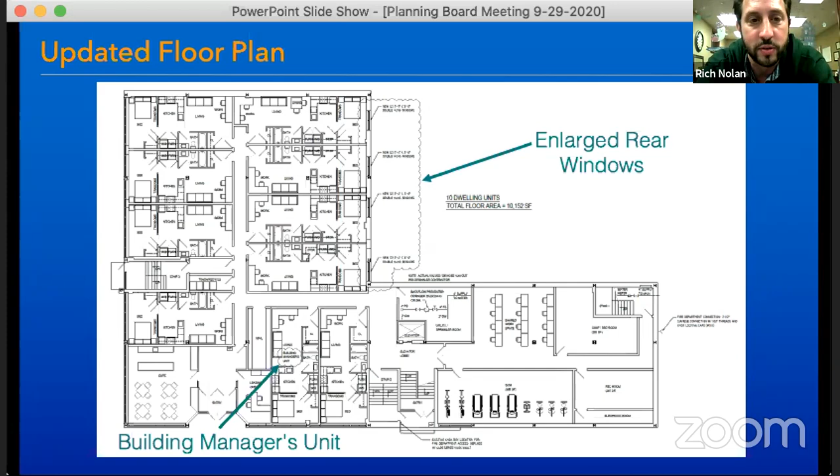One of the comments from the neighborhood was they would like to see an on-site building manager, maintenance person on site there, trash removal, somebody on site to just deal with problems and make sure trash is getting taken out. So we've designated a unit on the ground floor there that's being referred to as the building manager's unit. That was in response to a neighborhood request.

Guess you could move on. You brought this in here. This is good. One of the very recent comments that was brought to our attention is the USDO requirement to provide screening around any rooftop mechanical units.

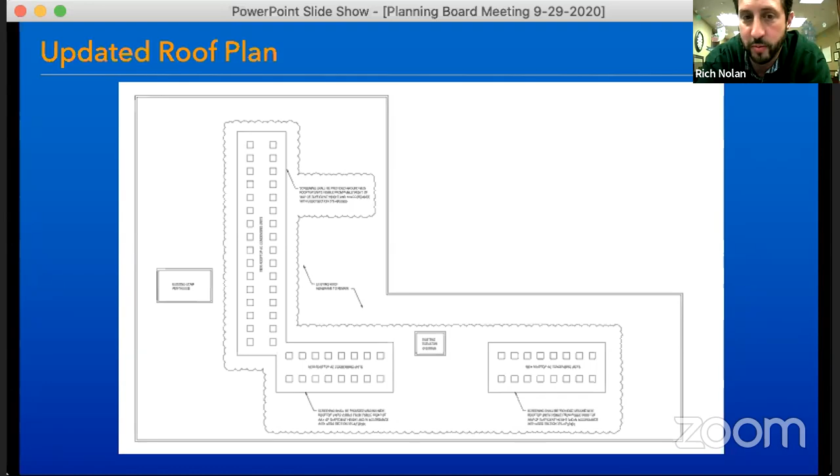It needs to be blocked from the public right of way. We haven't studied yet the site, how far back these are and the angles of view, but we're proposing here, if it's required, the appropriate height to block the view. You can see these boxes around the condensing unit on the roof. They're also required to go along with the architectural design. So we'll work through that as we continue to develop the building through building permit submission. That's the change there.

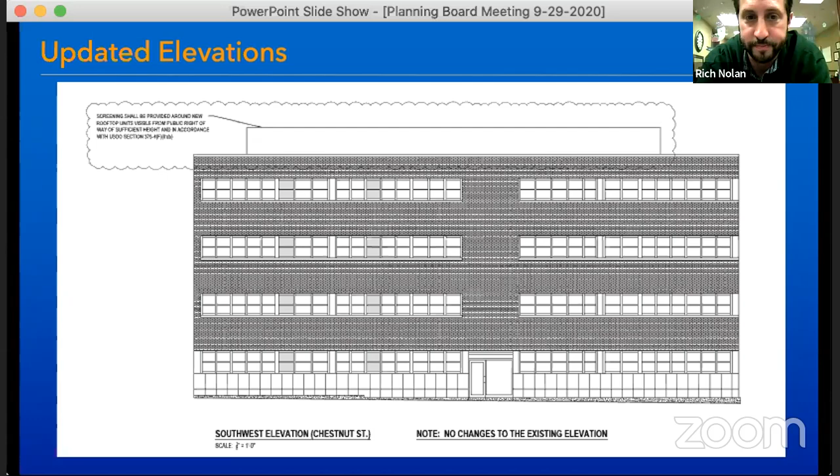This is talking about the same thing here. You can see an elevation that would be adding some screening on the rooftop. This is tough to see here, but you can see a little cloud there.

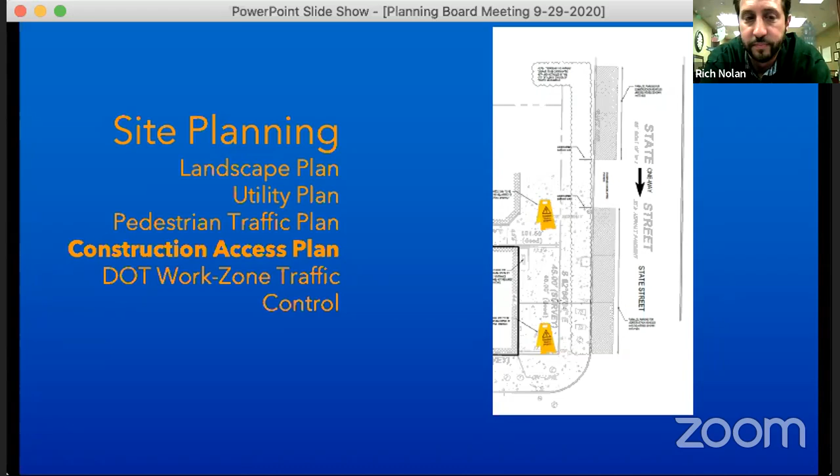Okay. Are there any questions or comments from the board members?

I have one. What kind of material do you plan on using for the rooftop screening?

This is something that just came to our attention today, and we haven't dug into it too much. We're supposed to go with the style of the building. It's a brick building, but we don't know how far back it is. We're thinking metal screening or a vinyl screen, maybe in a color that goes well with the brick. It's so far up there that vinyl or metal might be fine, and it probably shouldn't contrast too much with the building, but be similar.

It's not totally dialed in yet, and we'll keep you in the loop as we think through it more. But the first thinking is maybe a vinyl siding with a color that kind of matches.

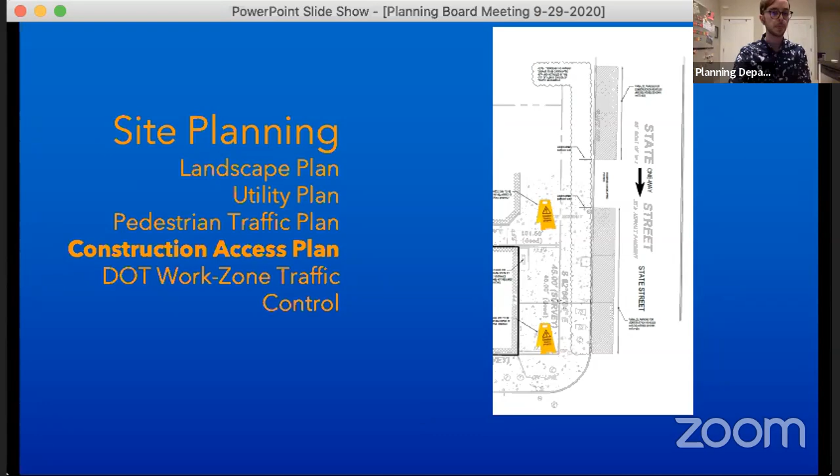This is the list of six review standards that the USDO requires the planning board to review in order to make a determination on a major development plan review application. I'll go through each standard along with our staff recommendation. So for the first one - sorry for the spacing - the first review standard is that the project will not create a significant adverse impact on the surrounding neighborhood, or any significant adverse impacts will be limited to a short period of time.

The project is located within a MUCU zoning district, but it abuts four other zoning districts. Impacts are anticipated during the construction period, but the applicant has provided a maintenance and protection of traffic plan to limit disruption for vehicles, pedestrians, and cyclists when materials are delivered and other construction-related activities occur. A street opening permit will be obtained for any work within the right-of-way, including proposed pedestrian aspects, which will be addressed through that permit process. The applicant has also spoken to securing parking for residents in the evening, responding to the change of use with more people requiring evening parking compared to the previous office use, where daytime parking was the bigger need.

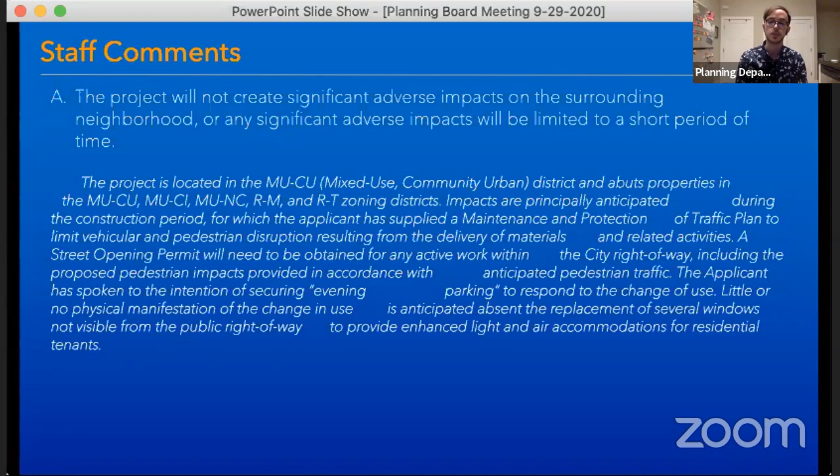Little or no change has been made to the physical characteristics of the building other than the replacement of windows, which would not be visible from the public right-of-way, and this improves quality of life for residents by providing more light and air.

The second standard is that the project would not create any risk to public health or safety. All potential impacts have been identified and mitigated to the extent practicable. The major one noted through our review is pedestrian crossings, since the proposed multifamily use would likely increase pedestrian traffic across the street to the plaza, so new crossing infrastructure will be installed.

In response to the neighborhood's comments, the floor plans have been revised to include trash storage closets, so there's no external trash storage. Also, a residential unit has been included in the floor plans for an on-site building manager to be more responsive to any maintenance issues at the site.

C, the project being consistent with any relevant prior approvals or conditions. There are no known prior approvals that the project needs to comply with.

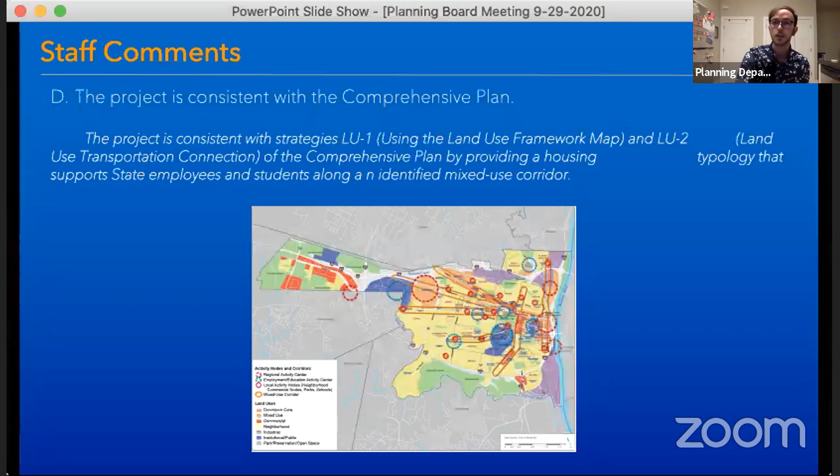The project is consistent with the comprehensive plan for strategies Land Use 1, which is using the Land Use Framework Map, and Land Use 2, which is the Land Use Transportation Connection. It's providing a housing typology that supports nearby state employees and students along the identified mixed-use corridor, which is shown on the land use map right here.

And then finally, the project is consistent with any provisions of the USDO and Albany City Code, which it has been reviewed by all relevant city departments and it does comply.

And that the project complies with any requirements and conditions of prior development permits or approvals. There are not any prior development permits or approvals related to the property that have any requirements or conditions that need to be satisfied in conjunction with this review.

And then just for the planning board members, the memo was sent out stating that this was an unlisted action through SEQR. But based on further review, it's actually a Type 2 action under section 617.5C18 — the reuse of a residential or commercial structure is a Type 2 action. So therefore, the planning board does not need to make a declaration under SEQR for this project tonight.

Okay, thank you. Will we have anybody testifying tonight for this? Were there any other questions from the board before I switch to public speakers?

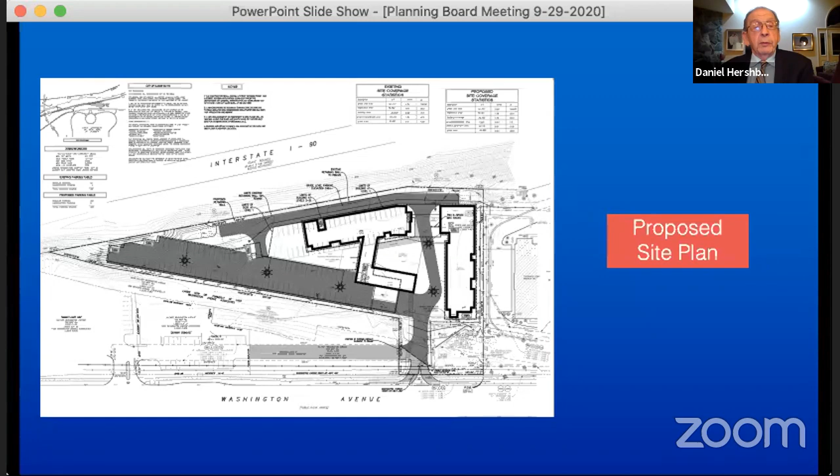Next, this is the plan showing the archaeological protection. In 1994, I was the engineer for a project called Washington Center, being proposed by Peter Gullo, the developer. It included everything from where 1355 Washington Avenue is to 1475 Washington Avenue, including the old Hellman Theater, the Hellman Hotel, and a lot of other properties. A portion of it was split by this archaeological easement.

In doing my research, when I did the environmental assessment form, this had not yet been declared a historic property. There were a few maps of it; nobody knew exactly where it came in here. I was lucky enough to have done surveys up and down the area.

The same alignment crosses down Brevator Street, Melrose, and this railroad easement went all the way down to Morton Avenue, the top of Morton Avenue, which is where the railroad really started. The people on the first railroad thought they could get the railroad to go up Morton Avenue. Unfortunately, the railroad needed to be pulled by horse and buggy to get it up to the top of the hill, and then after that it ran on its own strength.

So I got the history of that down, and we hired Hartgen. In the review, they also found remnants of the water culvert that came from 6 Mile Waterworks and went all the way down to the reservoir in the city.

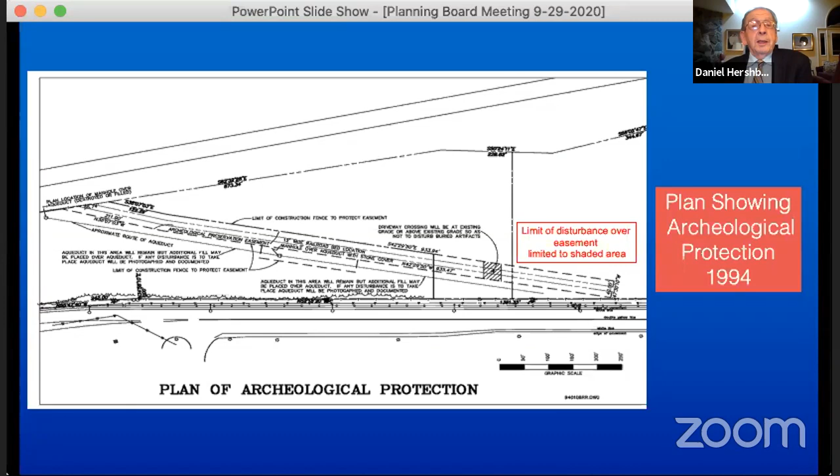So next sheet you can go on to. This compares the statistics with USDO. Lot width, we will exceed. Impervious lot cover is significantly less than that.

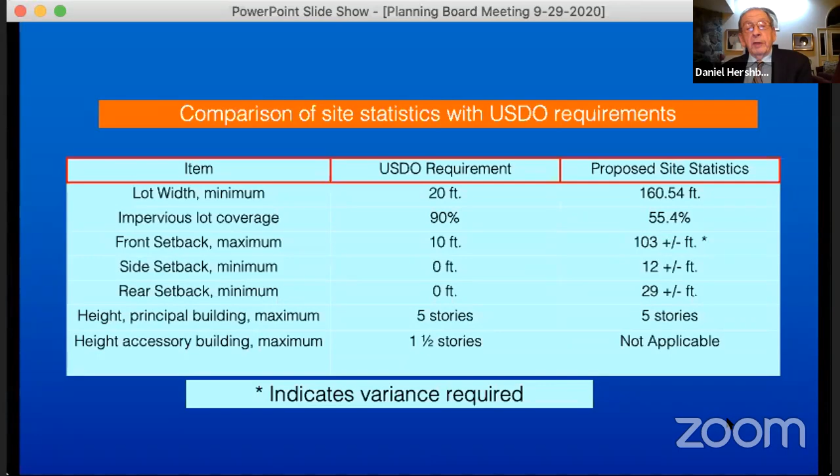The front setback is the one we need a variance for. The front setback is supposed to be 10 feet and we're 103 feet back, I'll explain later why that's necessary. Side setback is 0, we have 12 feet plus or minus, and a rear setback is 0 feet, we have 29 foot. 5 stories is what we're proposing, which is the maximum. We do not have any accessory buildings.

Chairman, you said we need 2 variances, and I think that was based on the fact that originally we proposed 207 parking spots, which exceeded the number required for the site, since we only have 240 units at 1/2 per unit. It turns out that on review of the zoning ordinance by Brad Glass, he pointed out that requirement only applies if it's surface parking. In structured parking, we don't need that variance. So we're down to 1 variance we need.

This is the historical easement. Now it may not look like much, but on the left you'll see the start of a berm that goes quite a ways; later on in the site it gets to be like 20 feet tall. The amazing part is that was all done by hand in 1831 - they piled all the sand up with wheelbarrows and hand tools to make that berm for the railroad to go on, and that still exists.

Unfortunately, the railroad ties, the rails, even all the appliances for the railroads had been taken off, so those are all gone. The photo on the right shows you looking to the east of the driveway.

That shows the other end of the driveway. Going through that, we put a wall in to preserve that portion of the easement, and we limited our area to the area that was allowed to be disturbed in granting this archaeological easement. Peter Gold granted the archaeological easement in 1995, and it obviously still exists today.

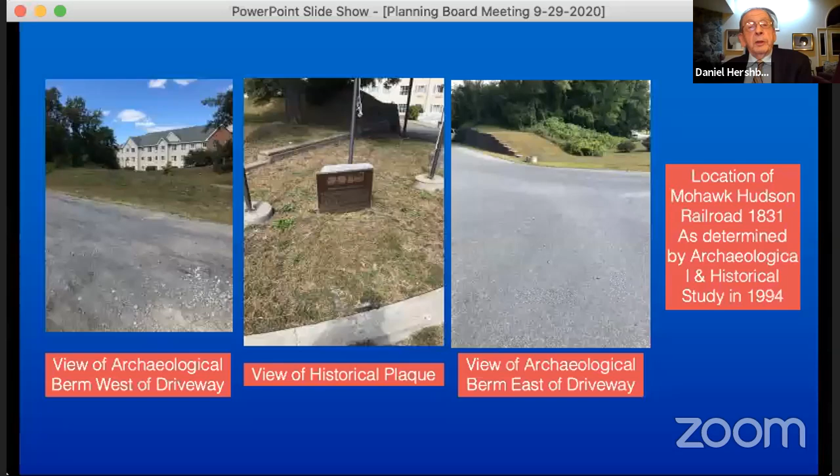Next. This is the report that was made up. It was phase 1 and phase 3. They actually did some recovery on it. It says remains of historical cultural resources were identified along the project area's northern and eastern limits. And this is the only remaining portion of the first railroad, the Mohawk and Hudson, constructed in 1831 and had the first intercity run of a railroad.

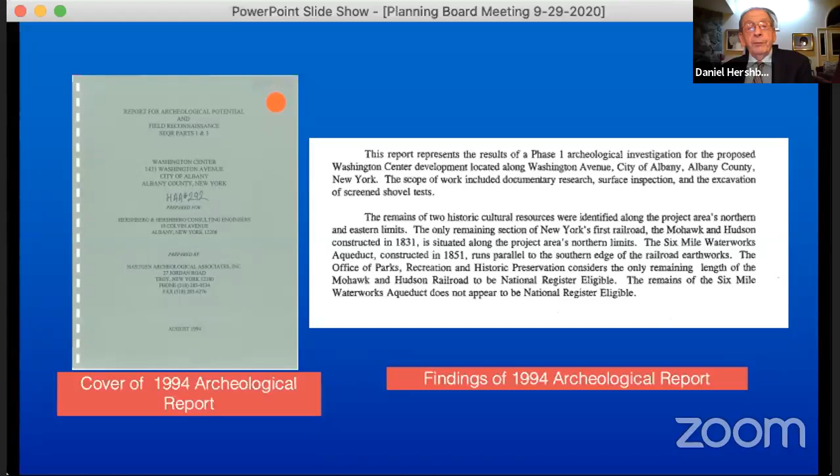Next, this is the view from existing and proposed view from Washington Avenue. On the left is the view of the Crest Hill Suites now. And on the right is the view of our new building superimposed on the same view.

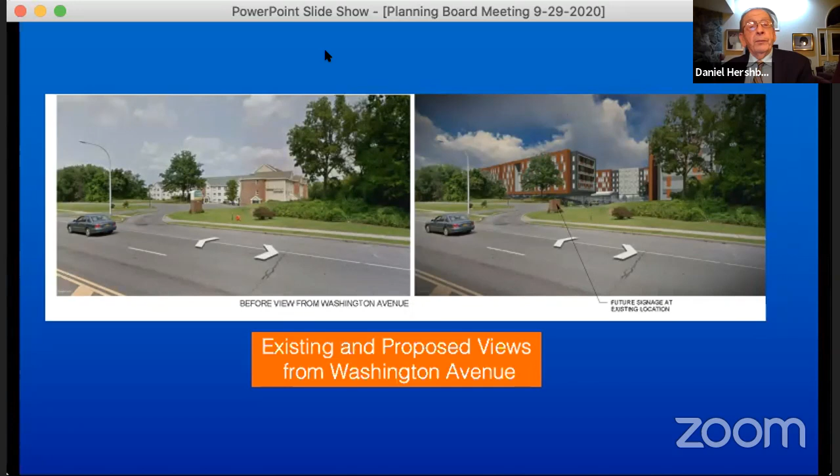Next, this is existing and proposed aerial views. You'll see on the left is Crest Hill Suites, on the right is our proposed project. Takes up the same space, but we occupy it differently.

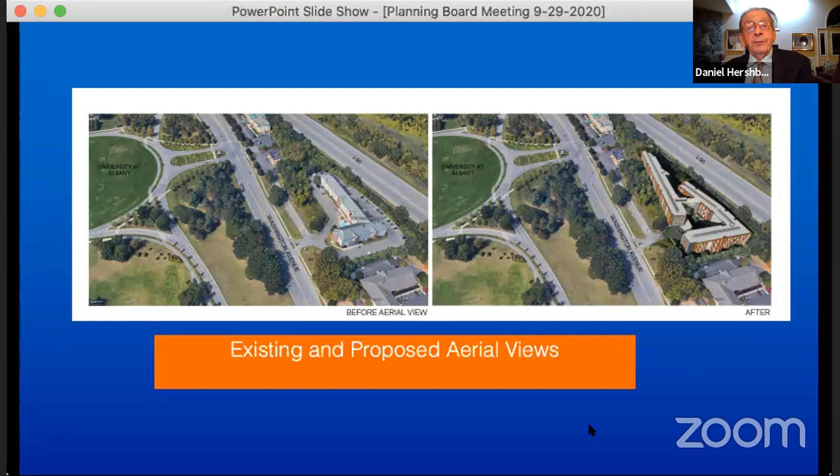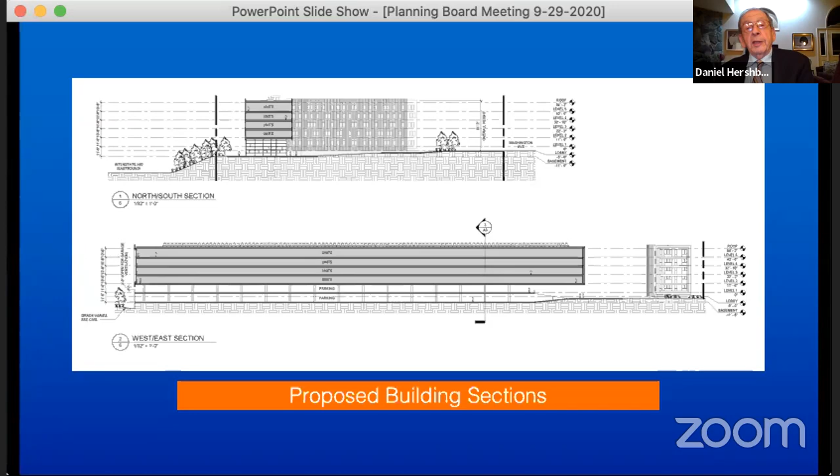Next, this is a section of the building, and it indicates the stories and the height of it, and it shows it in reference to the I-90 on the left of that north-south view, and the archaeological easements on the right portion of that.

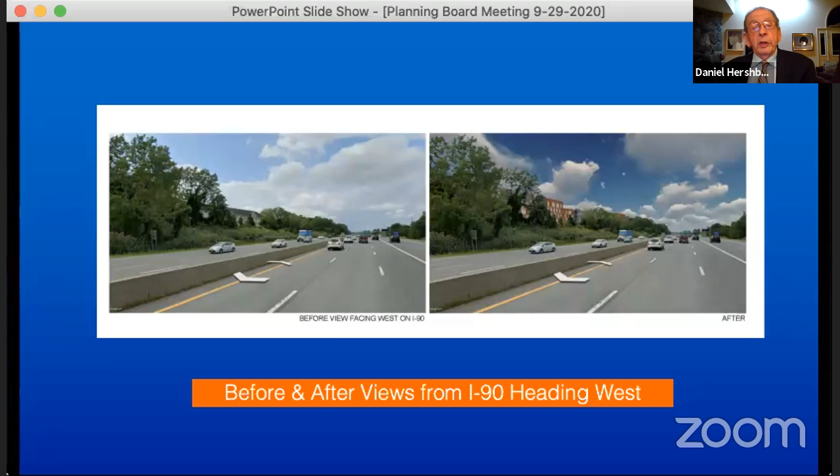However, there is a row of pines and spruces that was planted. People may recall when Cresthill Suites was first built, we built that retaining wall. Within 6 months, it became tagged very heavily. So we planted a whole bunch of coniferous trees along it to screen it, and it does a good job now. You can't see that wall at all.

Next, oh, that's the same view. I think I gave you before and after. I think that's the same view.

Okay, views from the plaza. This is internal to the site. One is looking at the internal plaza, and one is looking down the side of the building. If you're at the corner closest to I-90, looking east, that's what you would see.

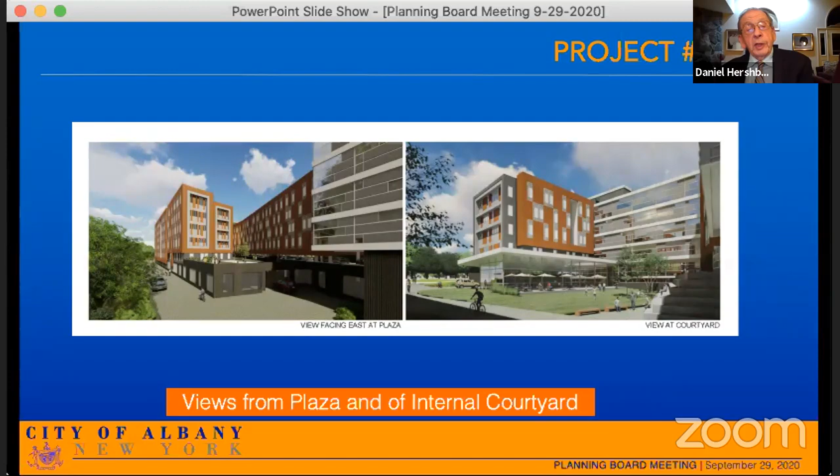Next, engineer's report on sanitary sewage. We had designed the I-90 pump station when it was first put in. We did a modification of it in 2016 by increasing the size of the pipe, so it now has adequate capacity to handle this project.

Engineer's report on water. The chairman was concerned about the water. Since the original projects were all built there, the city this past year activated a booster station on this entire system, which added the pressure by 10 PSI, so that the average pressure at the site was between 38 and 40 PSI and dropped down to 22 or 24 PSI at high draw times, is now going to be at almost 50 PSI.

That's adequate to handle the potable water without doing a pressure pump on it. For whether or not we run for fire protection, we'll wait until that design is completed. I think it may be enough, but we may need more. The water is a very small percentage of the available water, and the system is adequate to take it.

The chairman mentioned at the agenda meeting that there were signs up at the medical office building about what not to flush down toilets. I'm guilty, I'm the one who insisted they put them up, because the first time we opened that pump station, we found colostomy bags, plastic rubber tubing, and a whole bunch of things that don't belong down the toilet. So we put up that sign to try to convince people to use a toilet for its proper purpose. It's worked quite well. We find very little debris in the pump station now, and we have a screen system that grinds up any debris that comes into our pump station.

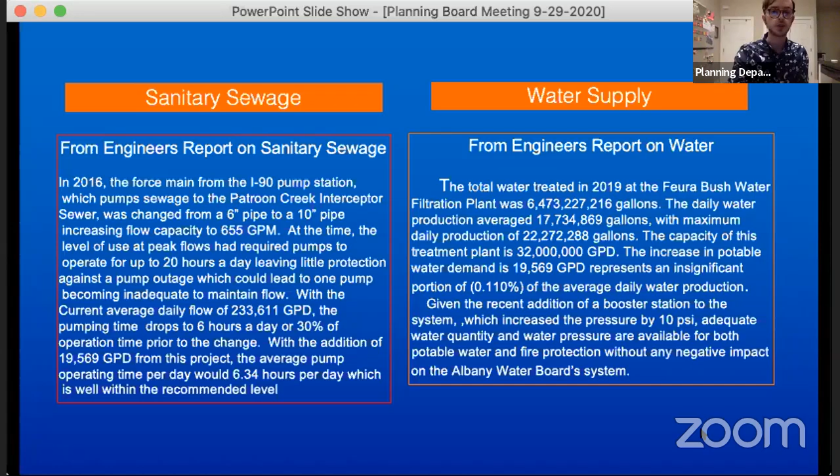Next. So Dan, that's actually ten minutes. I'm not sure how many more slides, let me look to see. Yep, so it's the last slide. Are there any objections from the board on continuing with just the last slide? I think we can keep going just a little bit.

Okay, quick summary: the development preserves the railroad embankment archaeological easement. There will be no change in the location of the curb cut on Washington Avenue. For potable water service, the new booster pump will not require a separate booster pump, and there will be adequate water for fire safety with the new booster pump activated. The decision on the fire pump requirement is awaiting a hydrant flow test, which we've requested from the city. Sanitary sewer collection and the I-90 pump station are adequate to serve the site.

The 2019 Washington Avenue Patroon Creek Corridor Study provided a variety of solutions, including pedestrian and bicycle improvements, and the applicant is willing to participate in funding that, since there are large portions of that project involved. The geotechnical study defined infiltration rates between 8.5 and 24 inches per hour, averaging 12 inches per hour, which is ideal for green infiltration methods including porous pavement, which we intend to use on site. Sorry, I took an extra minute.

Is that it? That's it. Okay, questions from the planning board? I have more of a comment.

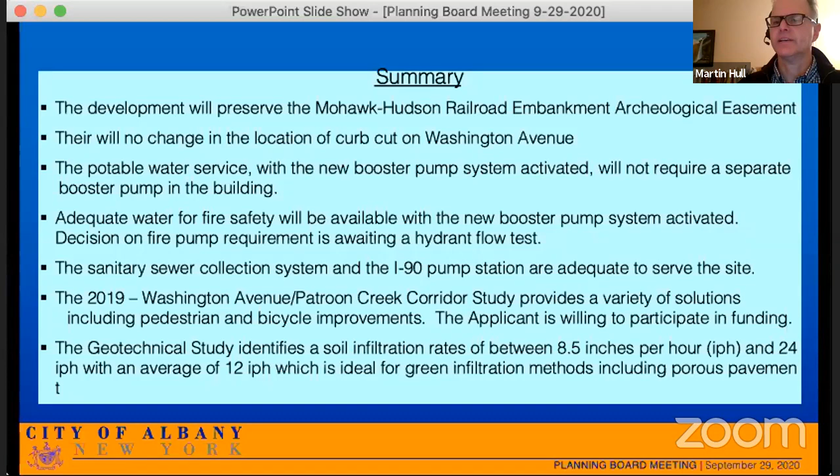Okay, thanks. Looking at one of the aerials that Dan showed, it seemed to already indicate there was a connection across the property. Am I wrong about that? There is access to the Dunkin' Donuts. I was referring more to the east. Back to the east. Okay. Thank you for the clarification, Martin.

We looked at connecting to the Extended Stay America, but it didn't seem like from student housing to an extended stay hotel there would be much inner traffic. When it was Cresthill Suites, it might have made more sense, but the front portion shown on the corridor study would actually interfere with the archaeological easement. We're willing to talk to the city about it further. Other questions from the board?

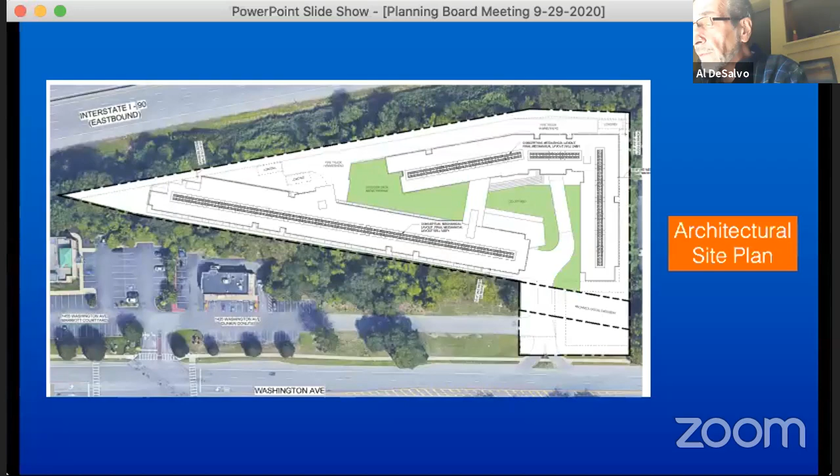So our task tonight would be to vote to declare the planning board as lead agency for the project. Do I have a motion? So moved. Moved by Roman and seconded by Chris.

Any discussion? As you might note on the agenda, there are a number of boards and commissions this has to go through before we move forward, so we'll definitely be seeing this project probably another couple of times. Thank you, sir.

Okay, all of those in favor, please say aye. Aye. Aye. Okay, it's unanimous. We will be the lead agency on the project.

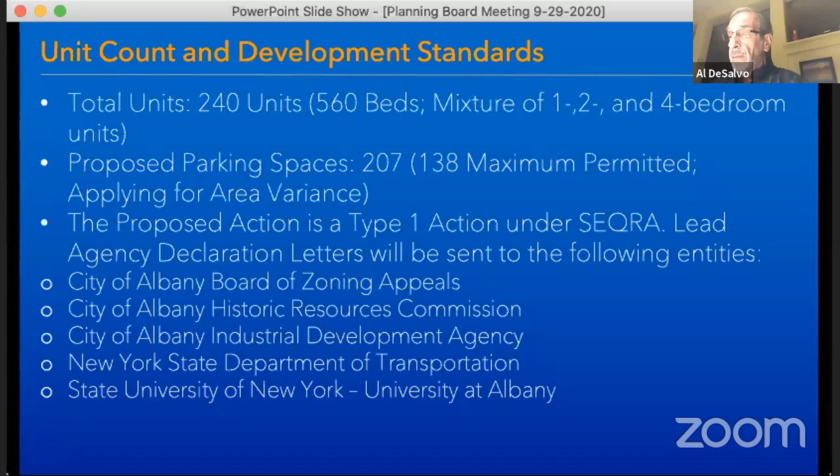Okay, the next item on the agenda is just an informational piece. We aren't taking any testimony. This is just to provide an update regarding 60 Colvin Avenue, and the update is on the result of the test pit sites.

And Al, just bear with me, I'm just bringing up... No, I'm not seeing it. Oh, I'm sorry about that, Tony. I forgot that Joe was not going to be attending tonight. Bear with me just one second. All right, Tony, you should be able to unmute yourself and turn on the camera if you'd like. How was that? Yep, there you go. Okay, perfect.

So I think just to give the board a little bit of context, the applicant had requested some time just to share the results of the test pit sites, since it was a point of discussion at earlier meetings for the project. So really this is just to share the results, and if there's any questions on what the tests found, essentially.

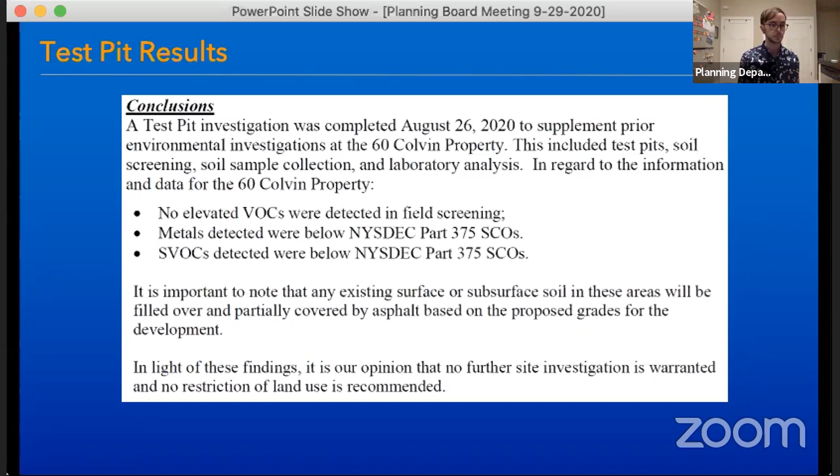Zach, could I just point out one thing? If you go back to that previous slide - that center red square that we dug, the one closest right there, that one, I believe there was a plan put in by Dan Hershberg. I asked him to overlap that with a yellow line indicated from a previous Clough Harbor study, which talked about an area of potential fill, and that is right in the center of that area. I had asked Dan Hershberg to provide me with two measurement points from the existing pavement and from the existing corner of the building to where we dug that. So I just want the board to know that, because that was one of the concerns, that we test that area, and that was there.

Okay. Any other thoughts, comments on this before we move on, or are we all set? Any questions from the board? Okay, I guess we'll move on. Thank you very much for the update, and we'll see this project, I guess, pretty soon again. Yes, thank you.

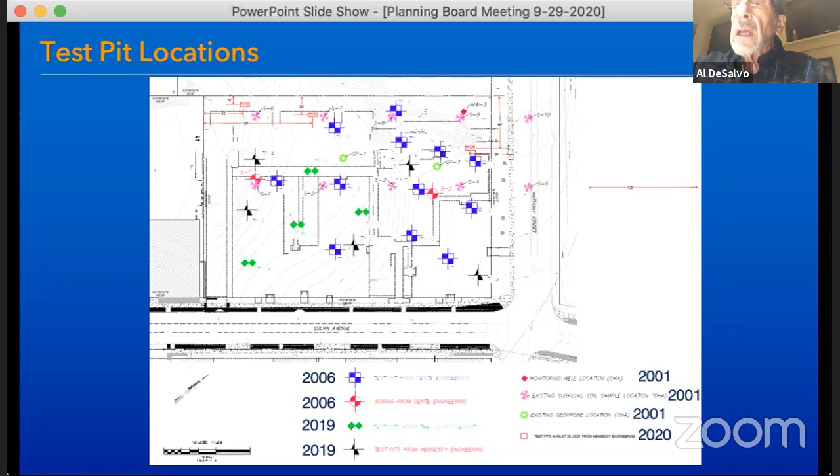Will this be presented by our counsel or by you, Zach? This is being presented by the applicant, and then once the applicant's done presenting, we'll go through the planning department's initial comments for the project, and also provide some time for board members to give initial comments based on a request made by the applicant. I think at the last meeting, the applicant was put at the very end, so it limited their time to get feedback from the board, I think due just to fatigue from a long agenda. So this was really the opportunity for the applicant to get the board's feedback and make sure they're heading in the right direction, so they can make any changes necessary to align with what the board was wanting to see for the project.

So the applicant will also provide an update regarding the September 21st Common Council meeting? Yeah, just to talk about the zoning map amendment as well. Okay, thank you.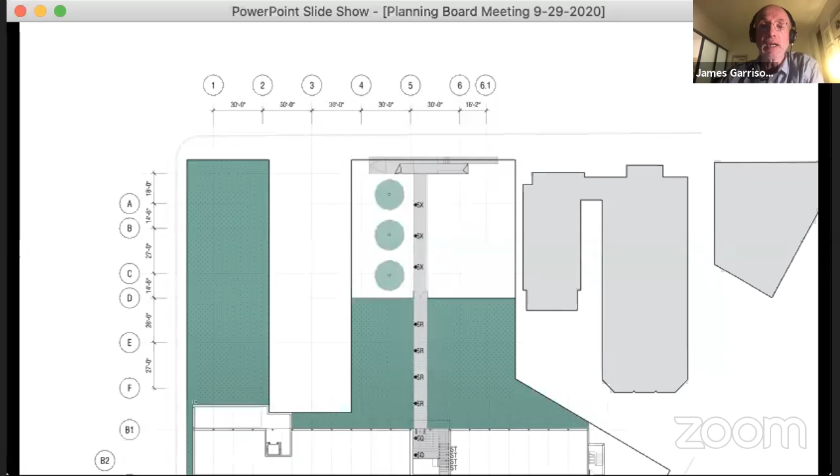All right, this is that entry. We constructed an entry, a place for people to walk, wait for the bus, get access up, take care of the slope, and basically you'll see Building B in the background, and a few trees in there. They won't be that big to begin with. All right, let's keep going. Just another image of that entrance gate / bus stop waiting zone.

Next, please. That's the bridge leading over the green embankment to the accessible entry, which ultimately would be integrated with Building A. But keep going, please. All right, this is a blow up of this area. Zach, if you can help me, that snaky piece on the east side is a ramp, and that takes us from the highest point we can get at it on Crank and brings a gentle rise of 1 to 20, so no handrails, up to the plaza.

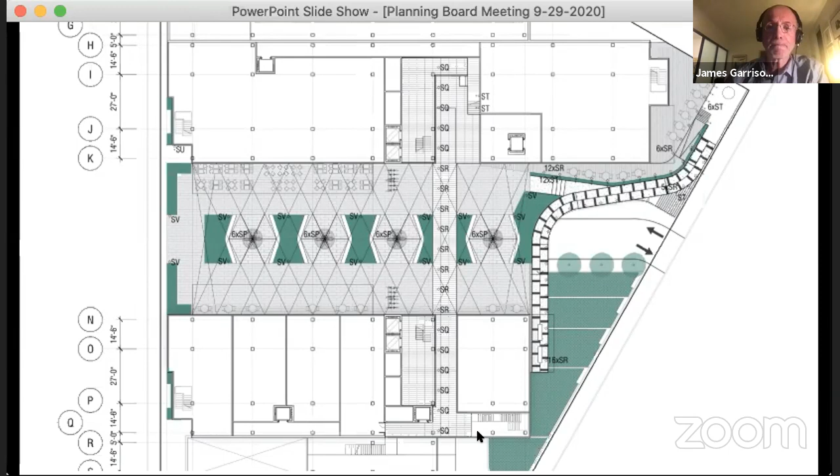And you can see in the Scott Street Plaza these vines reaching up and basically filling the plaza. We've also used two different colors of photovoltaics - we have them on the east and west sides, with a pattern that's a little hard to see here. The rest I think you know. Next, please.

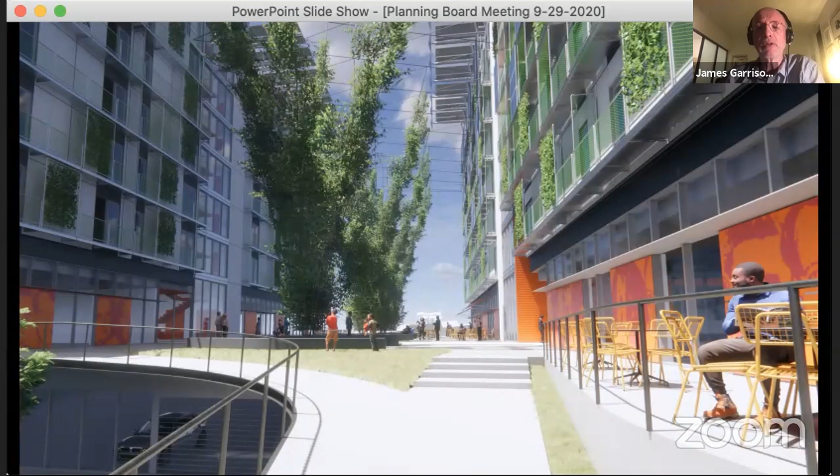This is walking up the ramp and seeing the last flight of steps, which will have a handrail for access from Crank Street. You can see the plaza on the left. Part of what you're seeing here are the graphics built into the glazing of the storefronts - basically graphics that can be backlit, meant to tell the story of people in the neighborhood, notable people we want to record the history of events and so forth.

The materials we're thinking of using are glazed ceramics for that orange interior - so it's bright, cleanable, durable. The panel system of the building is fiber cement. We use a very high quality fiber cement panel, integrally colored with very rich, deep colors. Very good panel - it's a rain screen.

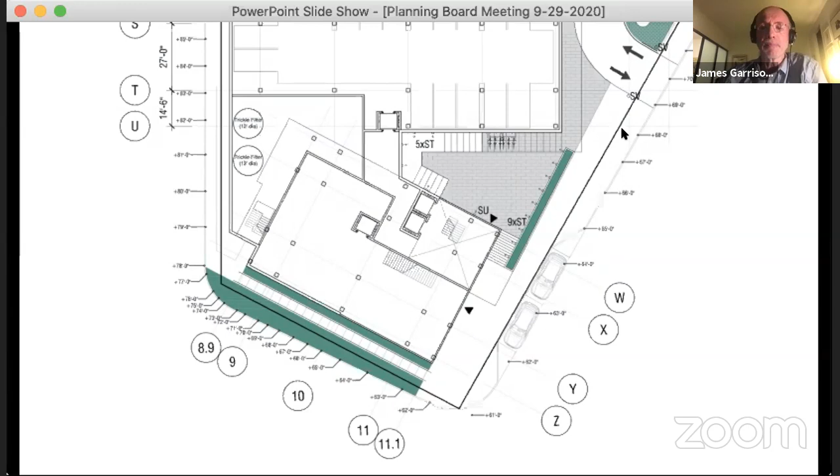This is the overlook next to the greenhouse, looking out over Crank Street toward Crank Park. It's covered so that you can walk in a covered fashion over to building D.

This is the greenhouse area, the loading dock, and the recycling center that we mentioned before. We're providing some detail so you can see how it's meant to work. These areas are set back quite far from the street, and we've worked very hard to reconcile them with the gradients over in that area. You can also see the drive in from Crank for the public parking area and the greenhouse.

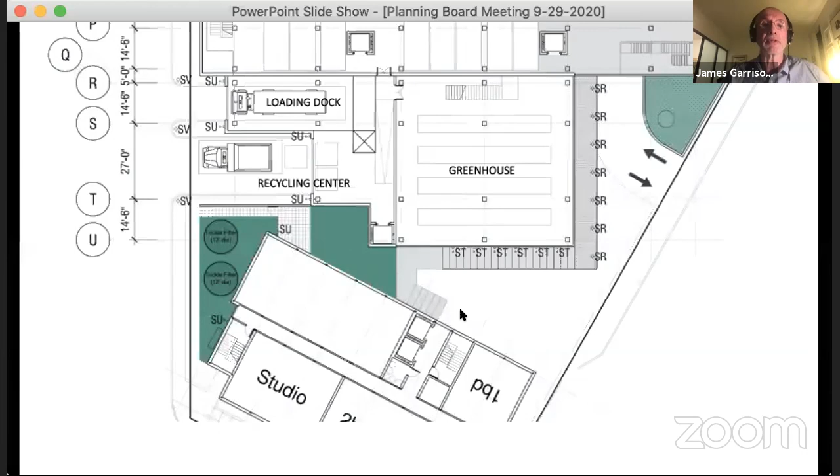We have a material board, and we want to get some materials in the flesh up to you. It's laid out - you can see most of the components and the colors and so forth, but we have a few details. Let's go to the next.

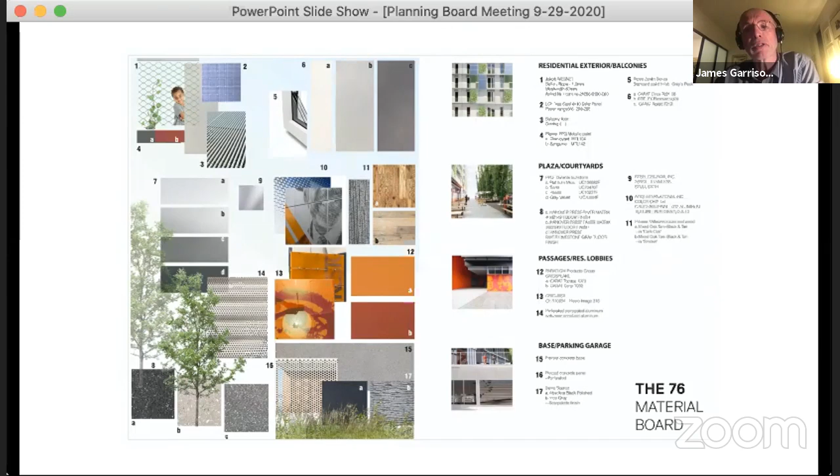So the residential and exterior balconies - the balcony areas are stainless steel Jakob WEBNET. It's a very tight pattern, very transparent, and the pattern is tight enough that children cannot climb it. We've used it on schools and so forth.

The blue is a solar panel. The balcony floor is galvanized steel. The planter will be metallic paint - we're using an Alpen stainless steel, and an Alpen fiberglass window, which is triple glazed and extremely durable.

Number 6 are the CARAT colors, which you can see are these kind of cream colors that we've chosen, and the REFLEX is actually a slightly reflective fiber cement panel that has a very beautiful finish.

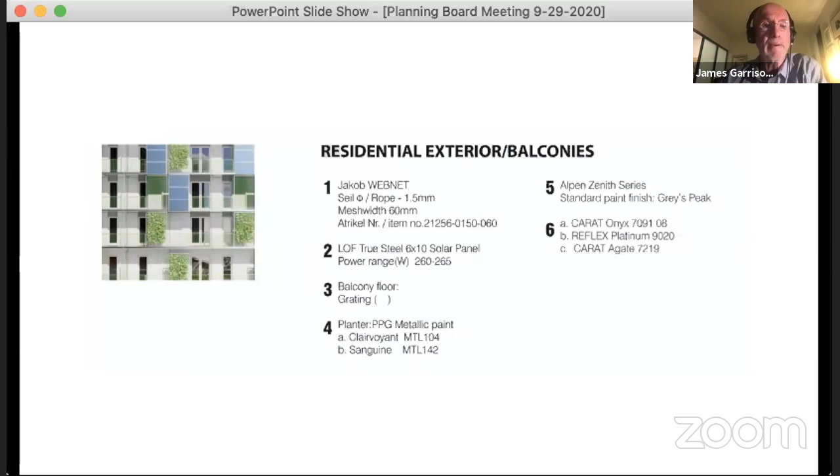So the plaza and the courtyard - there are a series of colors that are used, and they're listed here, you can see what they are. We're using Hanover, number 8, Hanover pressed pavers. These are variegated, speckled, highly pressed concrete pavers - there's a series of them in contrasting colors.

We're using stainless steel in some of the ceiling areas. There is perforated aluminum used in some areas, and we are using reclaimed wood in some areas as well. You can see them listed back in the full matrix. Let's go to the last.

So the passages, again, Swiss Pearl, it's the Paradigm Group. The glass is by Precursa, which is a company that makes that kind of glass. We've also used some corrugated aluminum with clear anodized finish for the ceiling areas. And I think that's it. Is that the end of it?

One more, okay. So the base of the cladding, the parking, precast concrete. And then we're using a bit of stone, basically inexpensive absolute black in various areas for benches or curb areas and so forth to set it off. And that should be it.

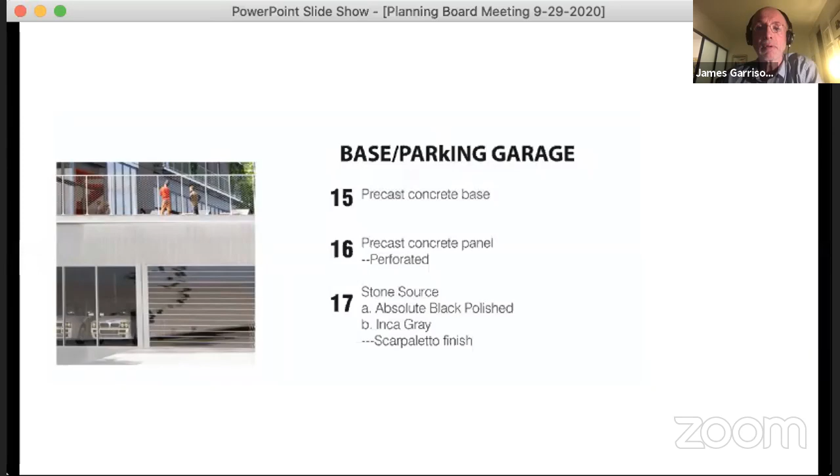Yeah, and there's the overall view again. All right, so that's the briefing.

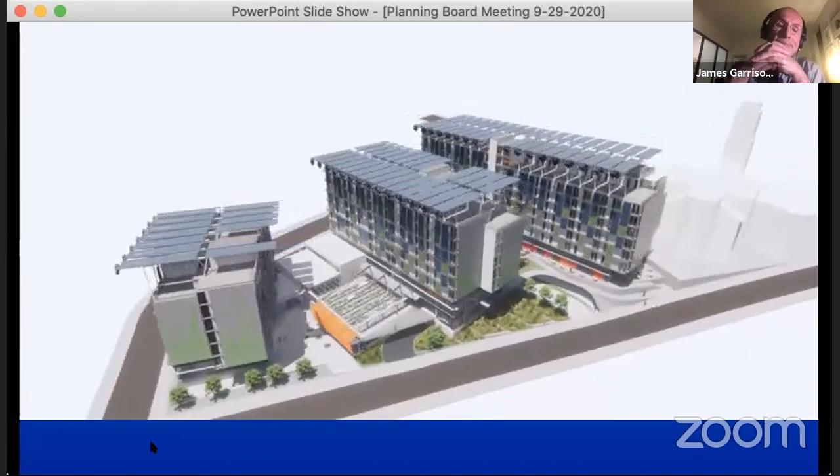And I think this has a video, like a flyover video, if I remember right. I'm not sure if everyone's able to see that. I can see it on my end, but... Yeah, Zach. Okay.

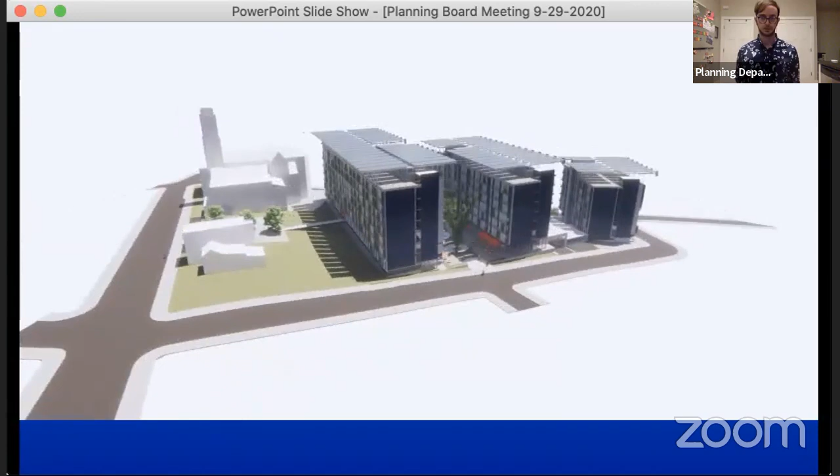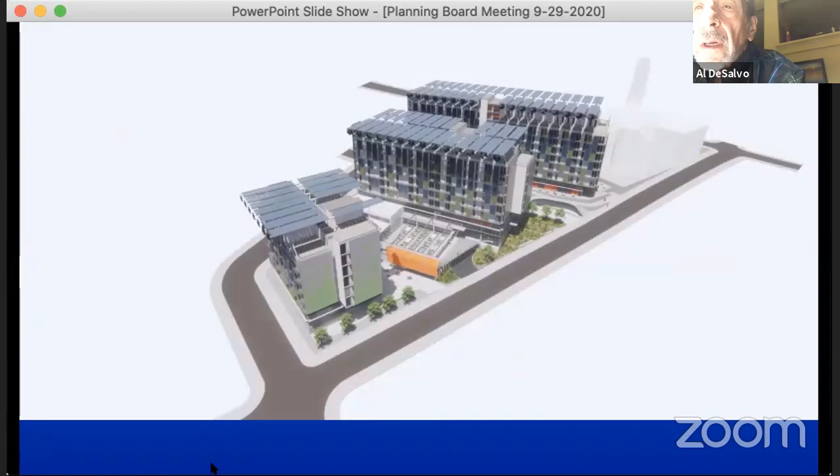In this video, when you swing it over to Second Avenue, I'm trying to understand the Second Avenue building that's right out there, the 76 building.

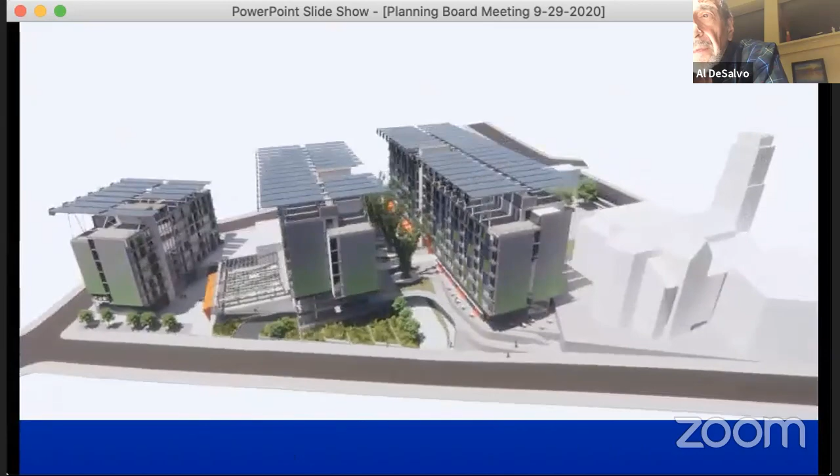I'll try and pause it.

Okay, you're right there. So this is phase 1: buildings B, C, and D. This rendering is not showing building A. That's our phase 2 building. Okay, no wonder. I was trying to figure out where it was.

We're still trying to figure out whether we're able to work out to acquire those 2 properties shown on the right, and until that time, we won't be designing that building. But before you showed an alternate plan that had that building there with the 2 houses, right? That's correct, that's why I was a little confused, wondering where it was in this image. That's our phase 2 design, so we'll be back before you for design of that building and review and approval at a later date.

I'm curious, the daycare, is there going to be any outside area for the kids or no? Well, they can use the upper terrace, but they're right next to Crank Park. So that's really the idea, they're diagonally across the street. So we thought, let's put the entrance where they had the easiest possible access to it.

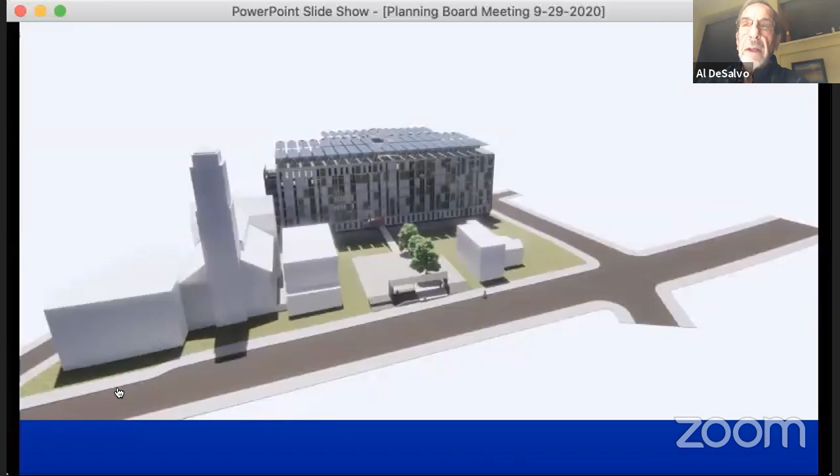I imagine you're going to have to do an awful lot of engineering, and you may come across issues underground that you haven't anticipated. But I would hate to see a project of this scale have, say, one dynamic building with all the glass and pizzazz you've shown here, with all those wonderful colors and textures, and then have the rest of the place look like a concrete bunker. I've seen too many big projects with great ideas that have not exactly fulfilled what they originally wanted to do. Well, that's a fair concern - that's the concern I have every morning when I get out of bed.

The thing is, I think we all have to work to make sure that doesn't happen. I think that's a team effort from us, from the city, from everyone. There's a very low standard in our country for housing in general, and we really are looking to exceed it. We're trying to make this building economical by using construction techniques, simple massing, and keeping the base of the building as rational as we possibly can.

And we've worked hard on that. You have to start with good bones if you're going to have a chance. But a couple of things have happened that give us, I think, a good indication.

One is that the legislature passed the PACE Act last week. PACE funding is for sustainable features for the building, and it is tied to the property as opposed to the developer's debt, so it stays with the property. And it has a very long time period for the payback, and it's very generous. All the things you see on this building that are expensive, including the facades, the solar panels, the balconies, the rotating panels on top, are all funded through the PACE program. And it's that program that allows this to be a progressive building.

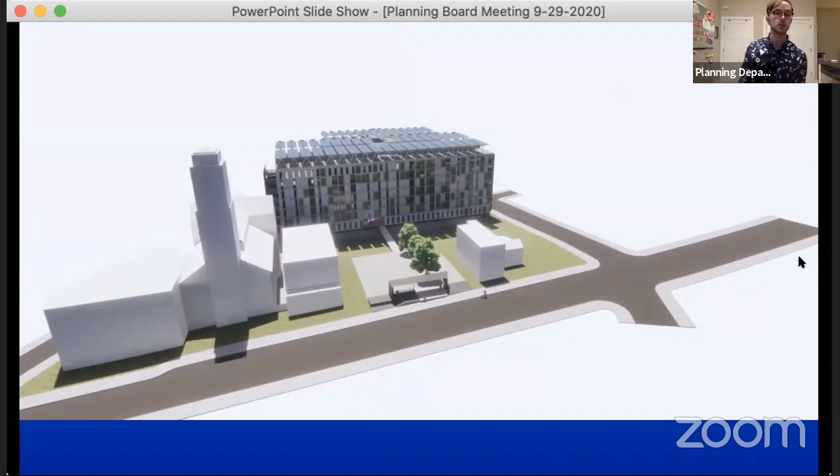So I will leave that up to the board on whether they want to take public testimony. I think in general practice it's probably good to have more opportunities than less to provide public testimony, especially since this is early on in the process, and that'll help inform the design and the process of the review. But again, I will leave that up to the board.

No, I don't see a problem with that. I didn't understand—wasn't my understanding that we would be hearing from council, but I certainly think that's fair and I have no problem with that. Do we want to hear that, or do you want to make the planning department comments concerning the design and the process first?

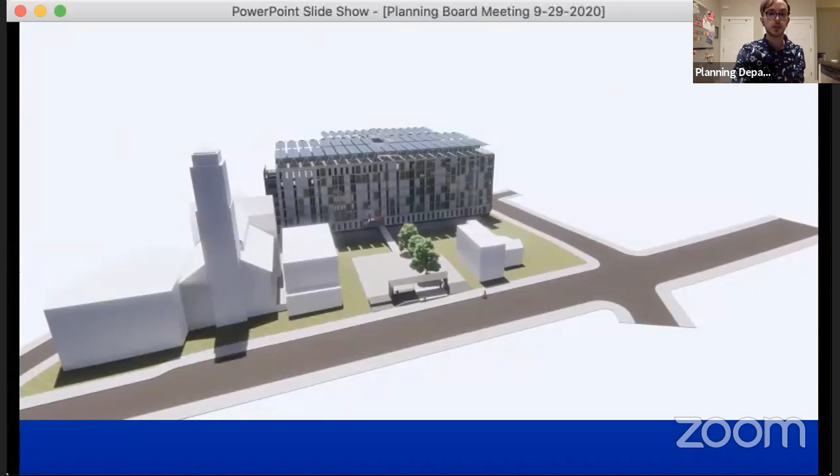I think we can have the council speak first. So give me just one second and I'll switch over to the timer. Okay, Mr. Baker, you will be on. And by the way, I believe there was a letter that we also saw.

Can you hear me, Mr. Chairman? Yes, I think everybody can hear you. Okay, thank you. Actually, I'd be happy to hear the staff's comments first—that may make my comments shorter. They're not going to be very long anyway, unless you want me to go first. Feel free to go ahead, Mr. Baker, since you're ready.

Thank you, and thank you for giving me the opportunity to address this. I represent James Dunbrook and Deborah Dunbrook at 86 Second Avenue, and Audrey Wedenbeim at 84. I just have a few comments, and I appreciate the opportunity. We made extensive comments to the Common Council during their SEQR review, and unfortunately the Common Council did a fairly inadequate job of addressing the clear potential adverse environmental impacts associated with that. Nevertheless, we're going to evaluate this project going forward, and my clients will determine what their legal rights are.

My first question is to ask for basic access to information. The case management file for this—the only one that still exists is the ZMA 007 file, which does not have any of the current site plan or current application. I think it's imperative that you create one for this. The number that's actually been assigned to this one already exists for another project, I think the Washington Avenue project.

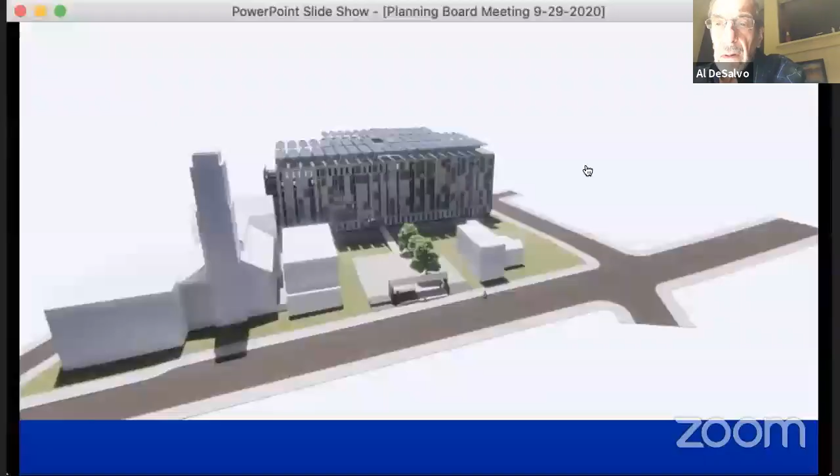To clarify, I believe that the project has been assigned a different number, which was 375, and that all of that information is up and available now. If I may, it isn't—375 is for a different project. It's actually 1415 Washington Avenue, if you look it up. If you search for this and go through the case files, the only thing that's up there is the ZMA application, which is most of the information that was relevant for the Common Council. But there is no site plan, and there's no major development plan application available on your website.

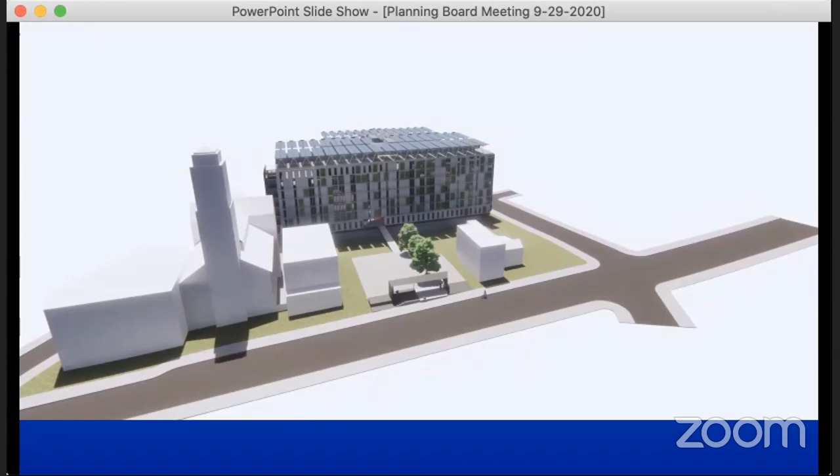Just to jump in—our department couldn't officially accept the application until the zoning map amendment was approved by the Common Council, because the proposed use wouldn't have been permitted on the site without variances. That's why it hadn't been posted earlier. We're still working to create an acceptance letter for the applicant; that's usually the point when we create a number for the application, and that's also when we typically upload application documents to the website. There's been somewhat limited staff time over the past week, so these documents will be uploaded soon and given a unique application number so that members of the public and council have an opportunity to view them. So yes, we understand that concern, and we want to make sure we're providing accurate information about the application in a timely manner. We're looking forward to doing that within the coming week.

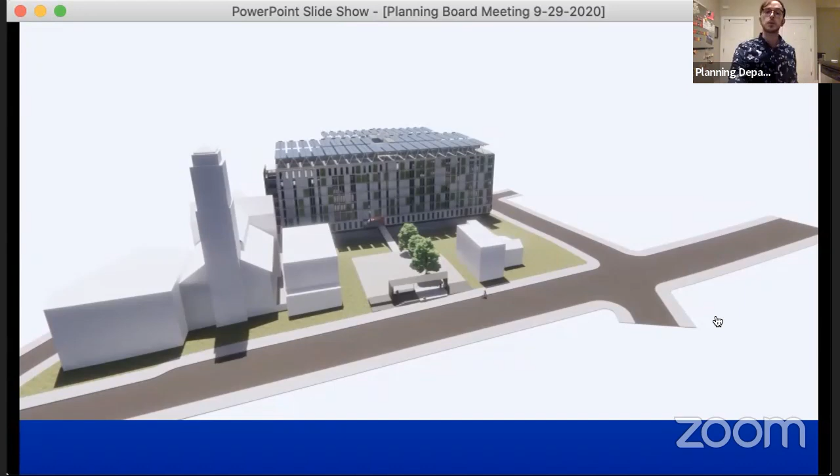Responding to that, I'll quickly go through the initial planning department comments for the application. Again, this is being reviewed by multiple departments. We've already had our Division of Engineering respond, as well as the fire department. The water department received some additional project materials as a response to the Division of Engineering's comments, so they are still reviewing their documents and will provide comments on, I believe, October 7th. We're still waiting on the Division of Traffic Engineering for their comments, but some of those staff members have been out of the office. So I'll move through the planning department comments. These were mainly responding to the August site plan submission, so some won't be relevant based on the updated application materials submitted by the applicant. I'll try to address those changes as we go through this, and I'll again try to keep it brief.

So, the first item—I think we'll be more than satisfied with the previous site plan submission. The lot coverage was very close but just needed to be confirmed. Given that it's showing 92 Second Avenue as part of the consolidated lot, lot coverage should not be an issue. Moving to the second issue, the front setback along Building B to 2nd Avenue does exceed the maximum permitted. This could be resolved by modifying the lot through a lot modification application to temporarily create a second lot between 2nd Avenue and Building B—that's up to the applicant whether they want to pursue that or an area variance. Then the parking garage on floor 1 would just need to be updated to remove the southwesternmost spot to comply with the 50-foot buffer requirement for parking garages from an R1L zoning district.

For dimensional standards comments, the applicant will need to submit an affordable housing compliance plan identifying at least 9 affordable housing units based on the applicant's intent for the site and its use. That's not seeming to be a problem—it's just something that needs to be done since they're proposing more than 50 units for the site. Based on the August site plan, a portion of Building B encroaches onto 70 Second Avenue, so a revision to the site plan to resolve that encroachment should be done, or a lot modification application that includes a portion of 70 Second Avenue. The proposed solar canopies for buildings B, C, and D will need to receive licensing agreements with the city since they extend over the public right-of-way.

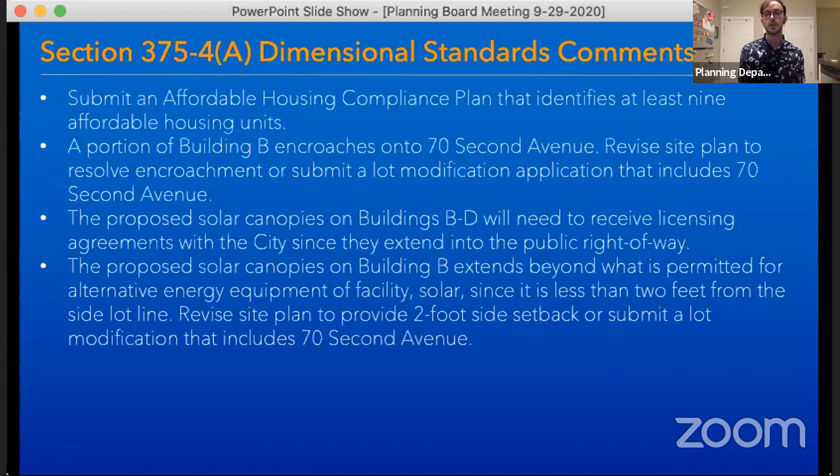The proposed solar canopy on Building B extends beyond what's permitted for an alternative energy equipment facility for solar, since it's less than 2 feet from the side lot line. So similar to the encroachment, just a revision to the application to either provide that setback or a lot modification, including 70 Second Avenue, should be done.

Under the access, circulation, and connectivity section, the proposed lot consolidation, including Scott Street, would exceed the maximum permitted size for a block, which is 1,500 feet, at 1,596 feet. So this can either be resolved through an alternative lot modification application or through an area variance.

For parking and loading, in the August submission, there was a deficit of 2 parking spaces after all adjustments in calculating on-street parking spaces. The applicant did submit a traffic demand management plan, which is being reviewed by our chief planning official to determine whether or not that's sufficient to cover that deficit.

In previous site plans and floor plans, proposed 75 bicycle parking spaces were shown. They weren't in the August one, so just updating the site plan and floor plans to include those spaces, and then the details for any proposed racks.

The curb length and space depth for the parking garages do not meet the standards for parking space dimensions, and would either need to be revised or seek area variances, or a waiver.

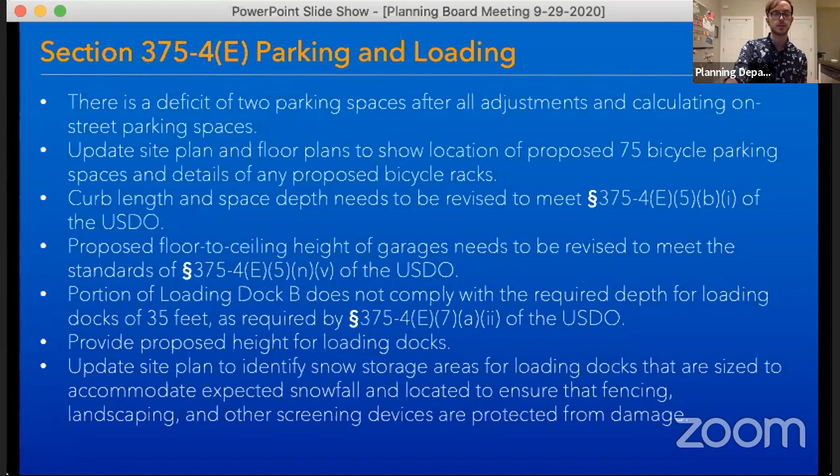We'll need to see a proposed height for the loading docks. And then also just including and identifying snow storage areas for the loading docks that will accommodate expected snowfall and ensure there's not damage to landscaping.

Under the landscaping section, just adding notes, confirming that there's the minimum radius provided free of trees or shrubs around fire hydrants, valve vaults, hose bibs, manholes, and fire department connections.

The landscaping plan will need to be updated to show side lot line buffers for side lot lines with 70, 84, 86, 89, and 92nd Street to meet the side lot line buffer standards of the USDO. There may be additional buffers that are needed if the lot modification changes for the site.

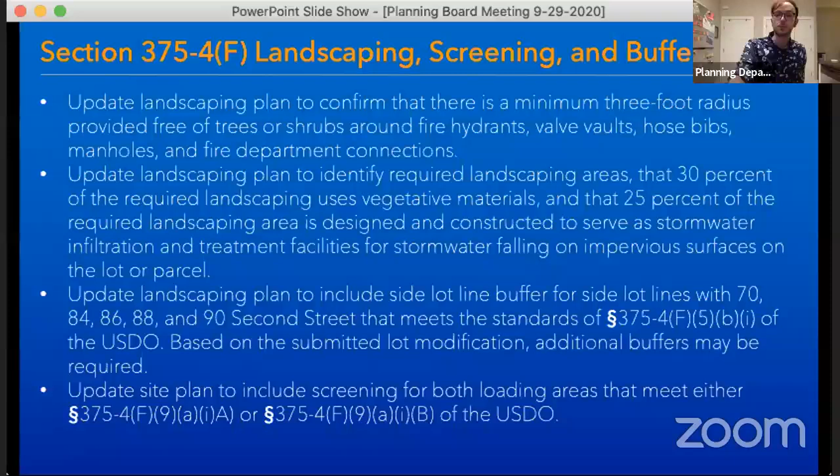And that the site plan be updated to provide screening for the loading areas that meet the loading area screening standards of the USDO.

For building and streetscape design, the updated submission addressed a lot of the issues with the elevations having visible pedestrian entrances, which was great to see.

There might need to be some changes to the facades of the retail units, because retail units are required to provide at least 50% transparency. So just needing to confirm that based on the new mural design. It might just be a change in how the murals are installed; it might be kind of a painted on effect onto the glass.

The elevations will need to be revised just to provide a change in design or height of the parapet, since it is a flat roof. And with the change in design, it needs to be at least 2 feet in height or design along each 100 lineal feet of the facade.

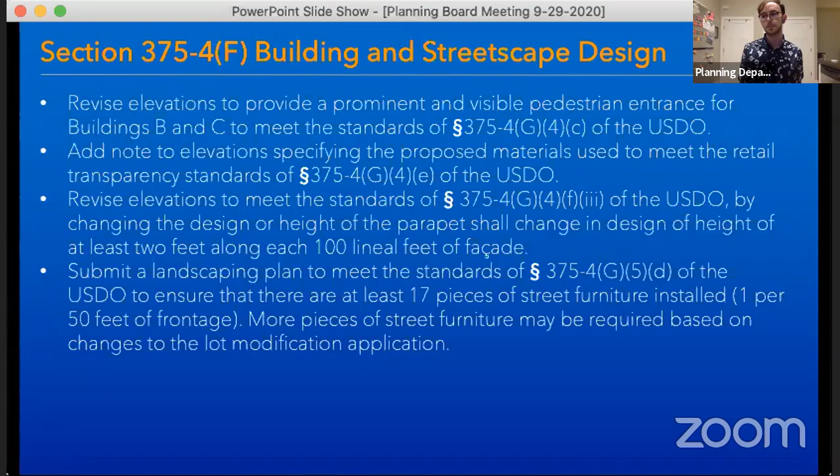And with the landscaping plan, it just needs to identify at least 17 pieces of street furniture installed, 1 per 50 feet of frontage. More pieces may be required if Scott Street does not become part of the entire site and remains a designated right-of-way.

And then just a more defined lighting plan demonstrating how the project meets the lighting standards of the USDO, which we were seeing a little bit of tonight.

And then some additional comments, our department recommends submitting photo simulations of the elevations along Crank and Leonard, showing how they interact with the opposite street frontages. The video was very instructive tonight, showing all the perspectives of the proposed development. We're also recommending submitting a service order request with National Grid to determine any potential conflicts with the proposed design and National Grid standards. We've seen this with some projects because National Grid identifies itself as an overhead utility provider, and sometimes that creates conflicts with the designs being proposed. So we recommend starting that process early on, so if there are any conflicts, those can be addressed prior to site plan approval.

Okay, so I believe you have your marching orders. Thanks, and Zach, can you share those slides with Stephanie and Kelsey? Yes, I'll share those with you. Thank you very much. And if you can get the appropriate numbers up in terms of the project numbers and all the information for the public as soon as possible, that would be very good.